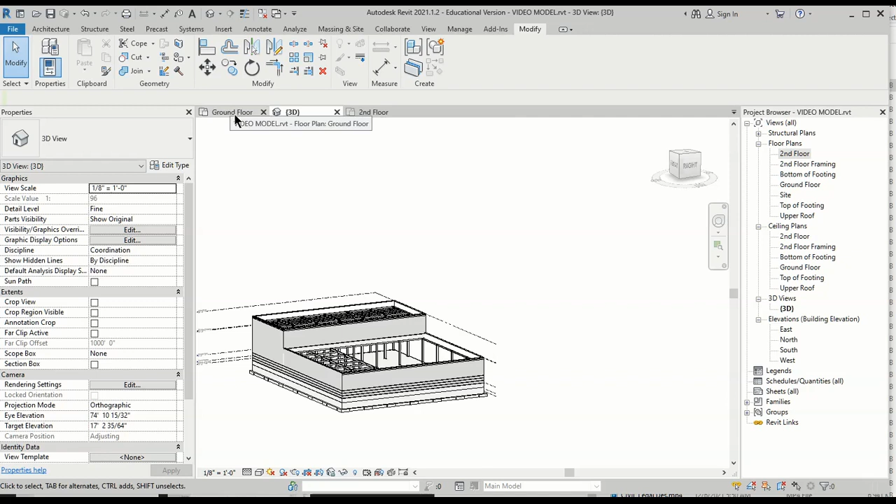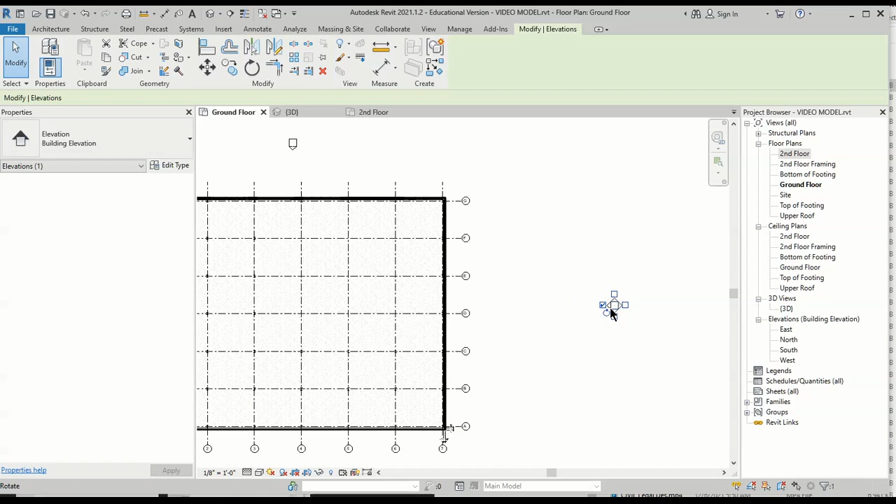So what we're going to do is add a roof by extrusion. One thing we'll need to do first is work with this east elevation. If you click on it, the little triangle at the front, you'll see this blue line cuts inside the building. So with this elevation, we're going to move it back quite a ways, grabbing the blue line and moving it outside the building.

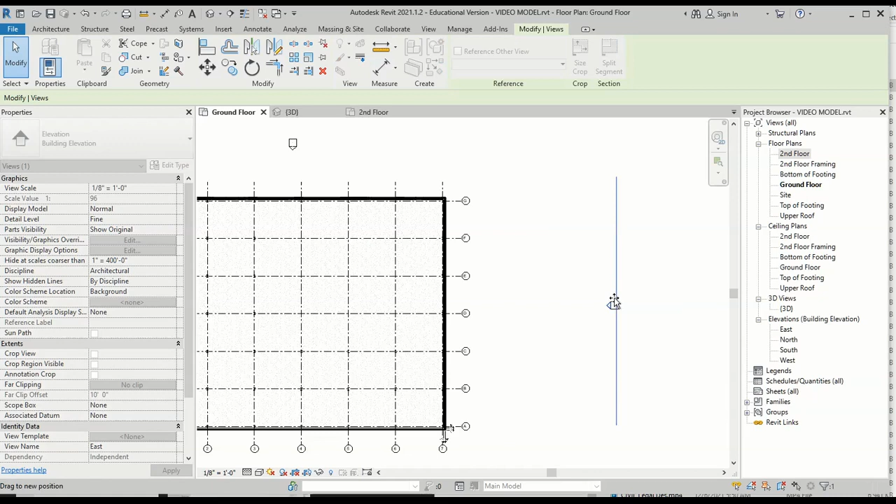That's going to let us see the exterior of the building. So right now, when you do these elevations, that's actually a really great way to do it. Let's click this and move that elevation view intersecting that. Now when we go to the east elevation, we'll see the building. Let's remind ourselves what we see here.

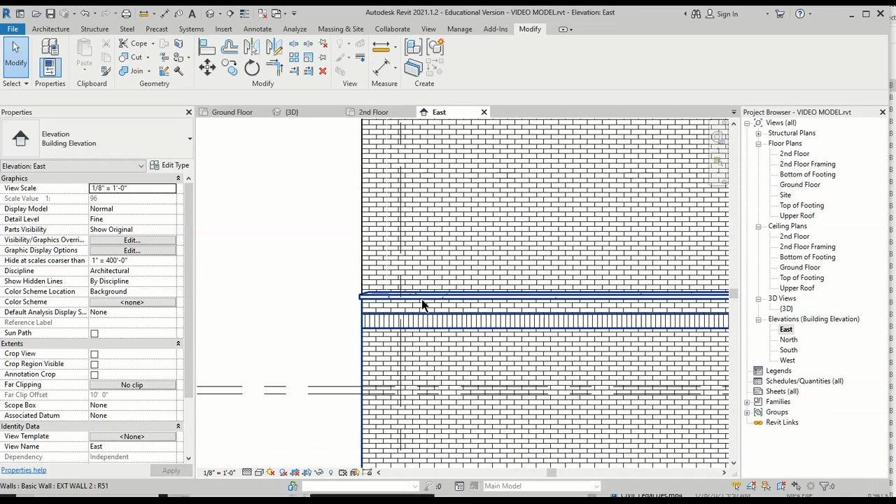Go over to the edge. If you follow these lines across, we have this soldier course, and then we have this parapet cap on top of that. We're going to make our roof line cut that. So we'll go to architecture, click on the drop down for roof, and choose roof by extrusion.

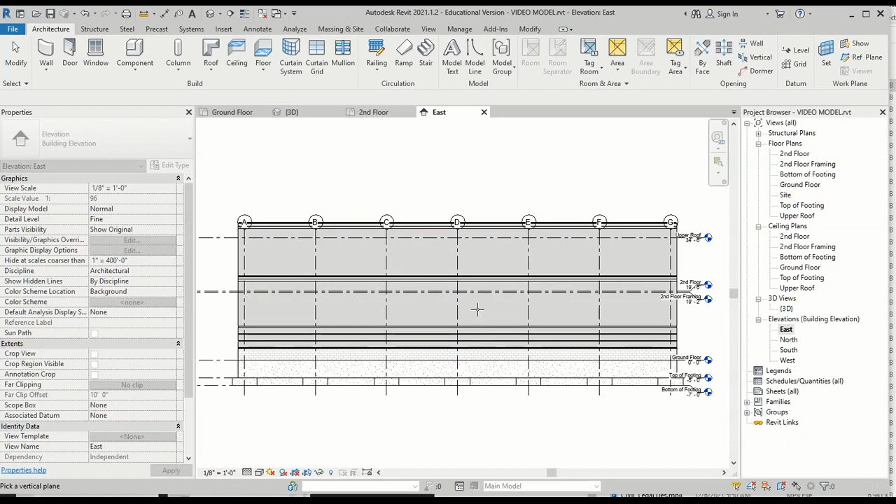It says we need to pick a plane, so we'll click OK. We want to click this wall that we split earlier, so you can see it light up. And then we're going to click OK.

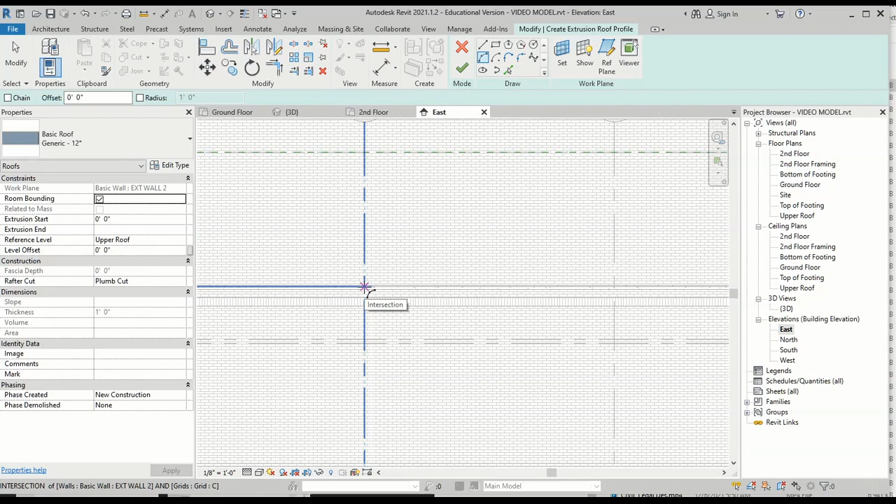Then we're going to go up and draw a sketch. I'm going to click Start-End-Radius Arc, and I want to zoom in on C and drop just below that parapet cap, somewhere between the soldier course and that parapet line.

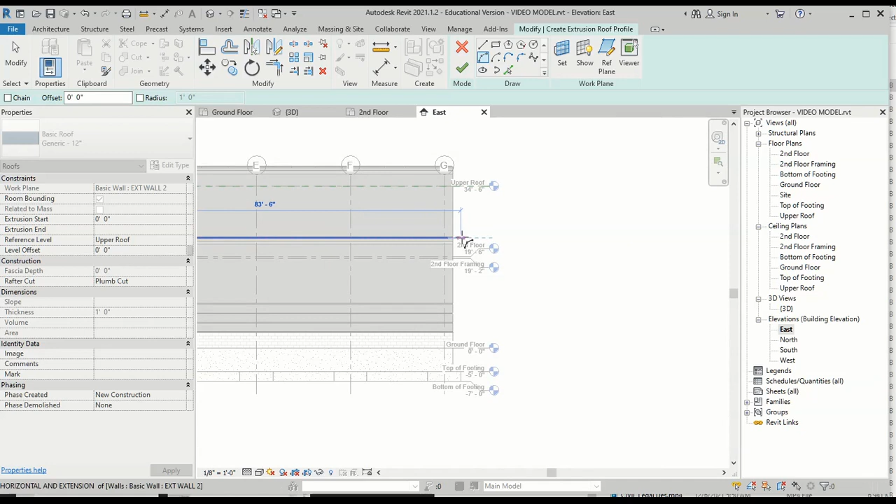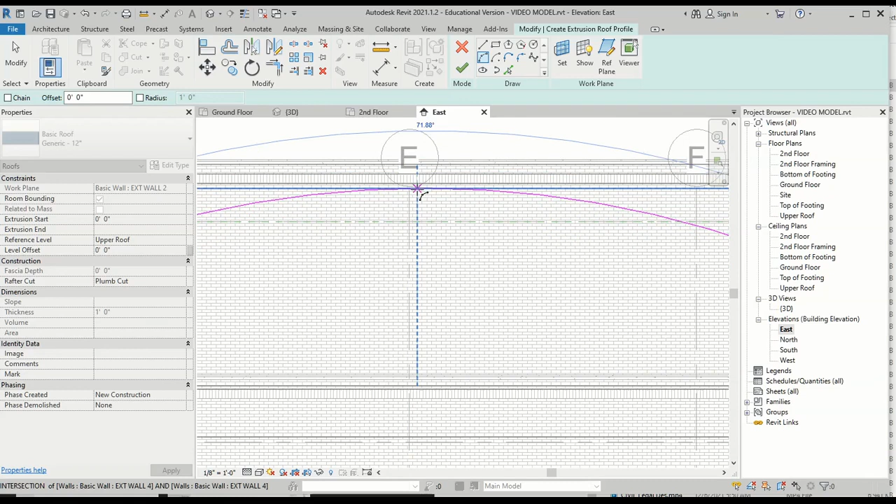I'm going to go just below it right there. The next point, we're going to take this pink line all the way across, horizontal, just outside of the building with a little bit of overhang—you'll see why in a moment. Now I'm going to zoom out and in a bit, and I want this to be below that soldier course, something like that, so if we make changes it's not going to cause problems.

Right now it's a basic roof, so this will work for now. Let's go ahead and duplicate that and make it 10-inch rafters. I'm going to duplicate this and call it gym roof. The roof is actually a lot more complicated than this, but we're just going to call it 10-inch.

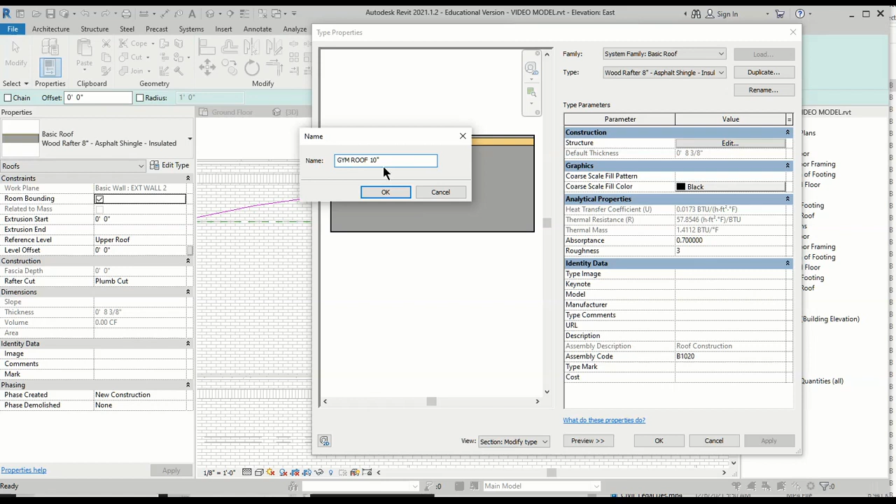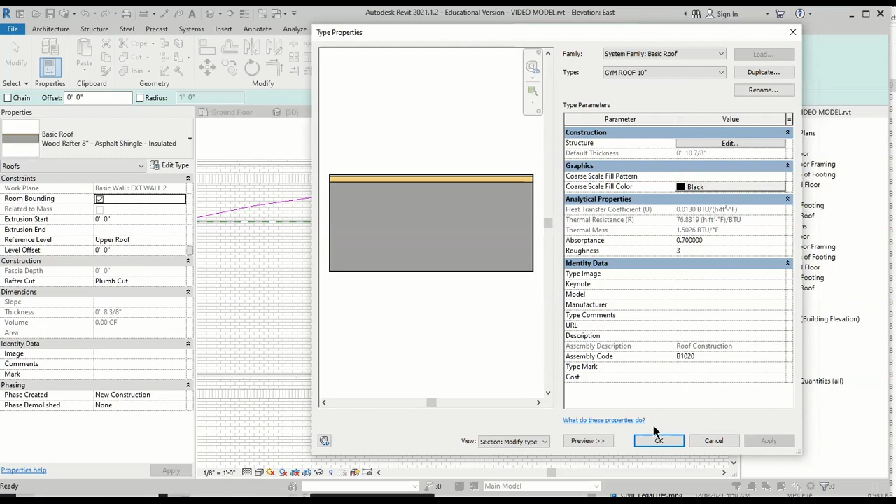Then we're going to go edit this, and where it has this 8-inch, let's make that a 10-inch rafter. That's going to be enough for us right there. We'll click OK, OK, and then hit check. Now we have a roof.

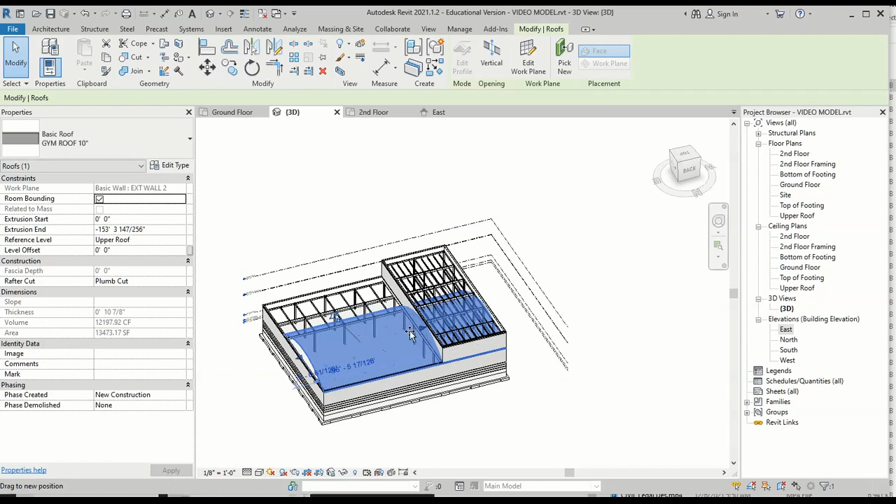Now we have to go fix a couple things. One problem is it goes all the way through the building, and we don't want that. So what I'm going to do is take the roof line and push it outside of the wall. I'm going to go to the second floor, still have the roof selected, zoom in, and move that to the edge of the brick right there.

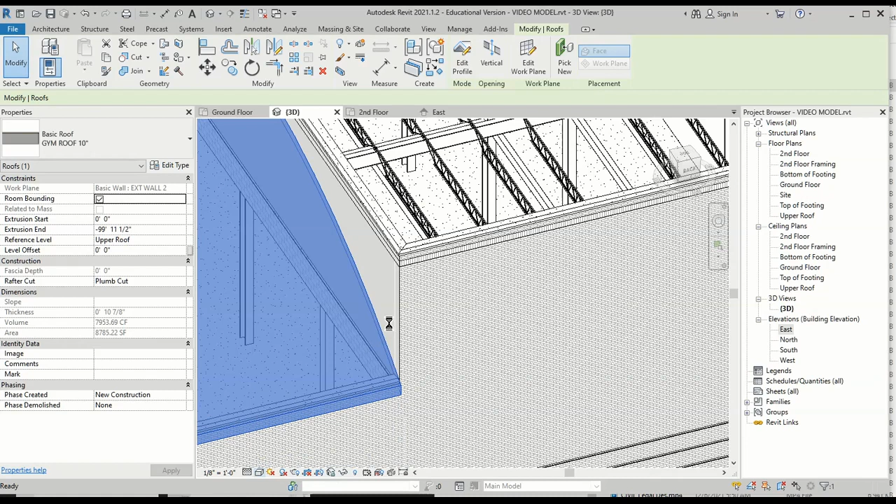If we go to the 3D view, we should be able to zoom in on that and make sure that's fine. I'm going to switch this to realistic, and let's do shaded, so we can see that there's not a gap there. That's the main thing I'm after—it doesn't cut into the second story, and it stops at that wall.

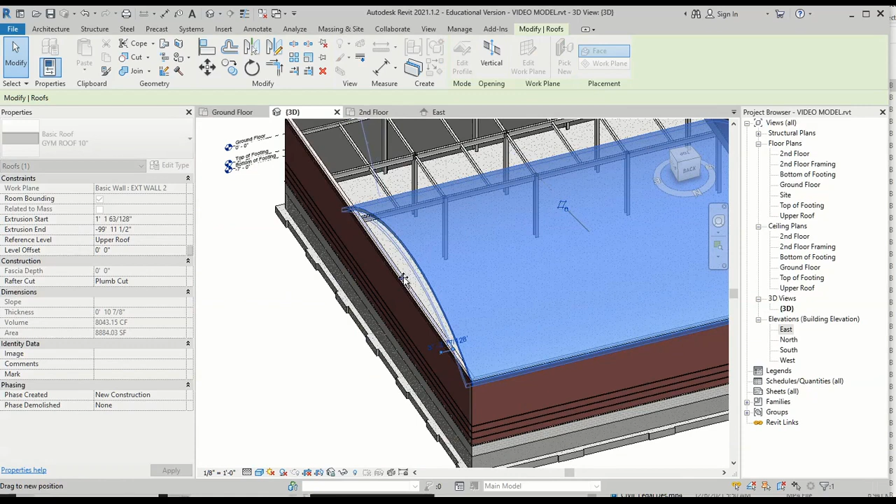The other thing is, to make this look clean, I want to extend it a little bit. So right here, I want to see a little bit of overhang. Not giant—don't pull it out a whole lot, just pull it a little bit.

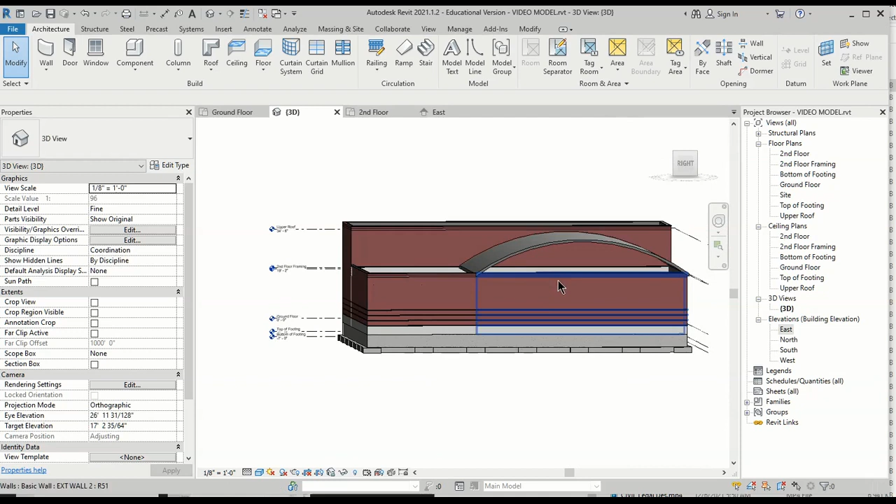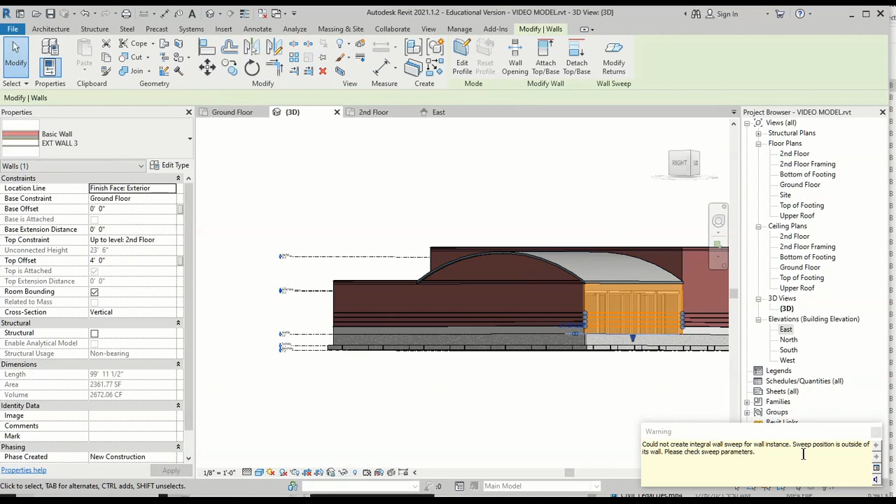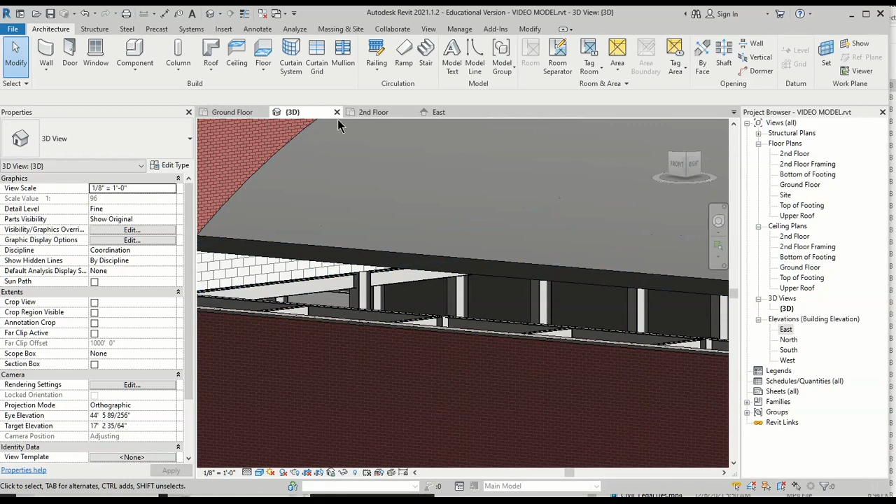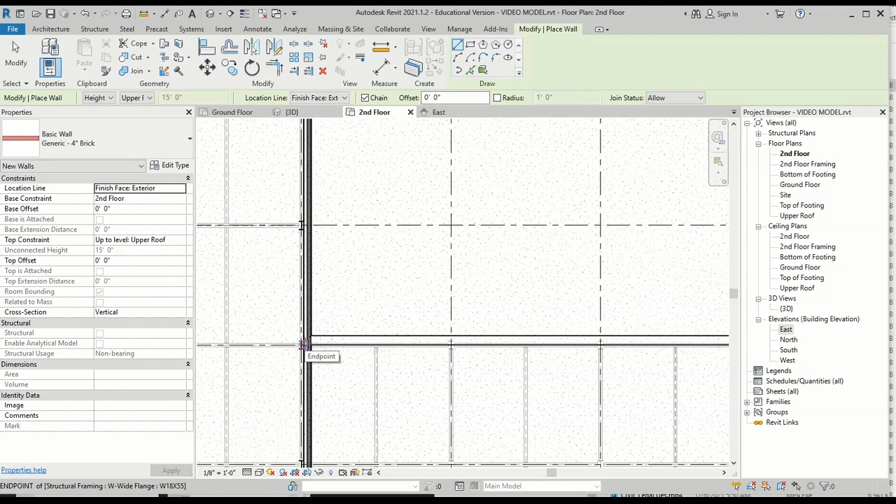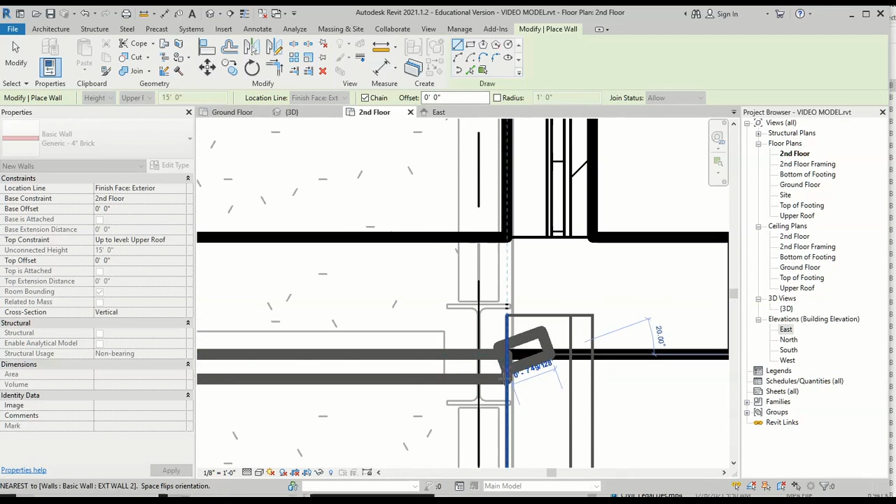For the start, I'm just going to go right here where that brick starts, click there, and follow that line all the way to the brick wall here, right up to that. One thing I want to do is click that wall and push it underneath the edge of the roof.

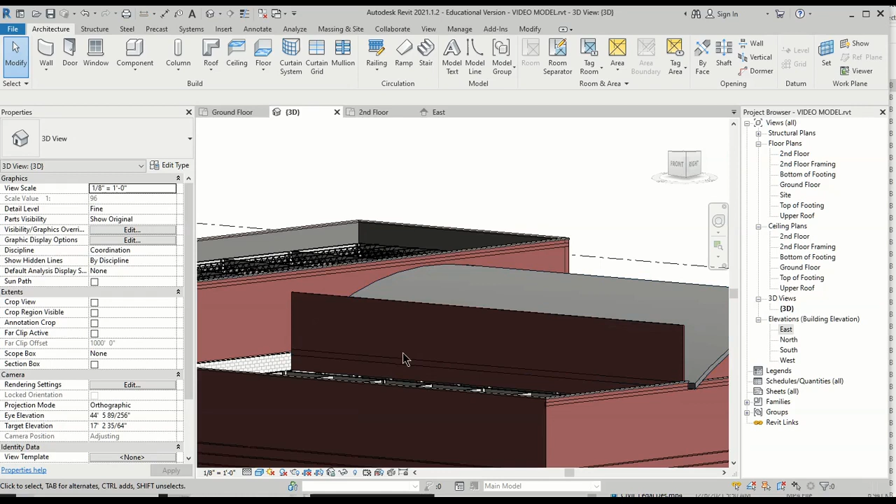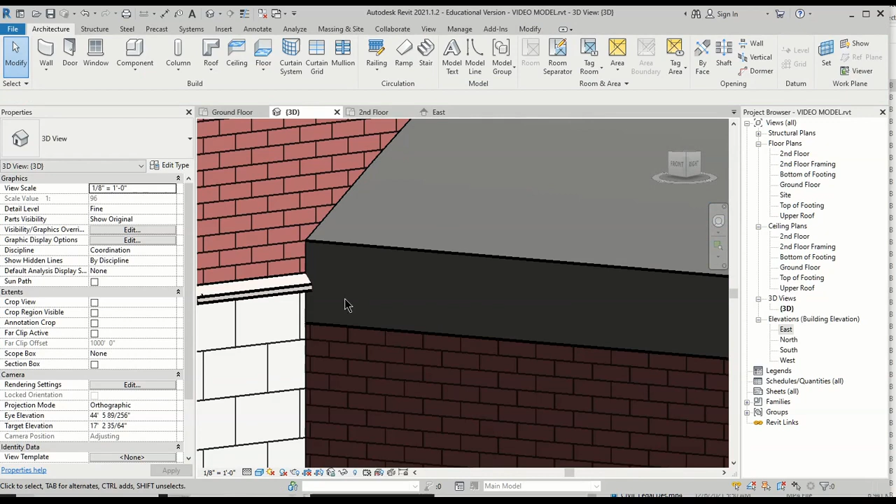Now when we go to our 3D view, it's going to look kind of weird because we've got this very tall wall right here. So we'll click the wall and click on attach top and base—that's the reason I pushed it under, so we could do that. Now we have a smooth connection between the roof and that wall there.

All right, so we've sealed that up. When we add the floor and stuff in, then it will be just right. Okay, that's enough for this video.